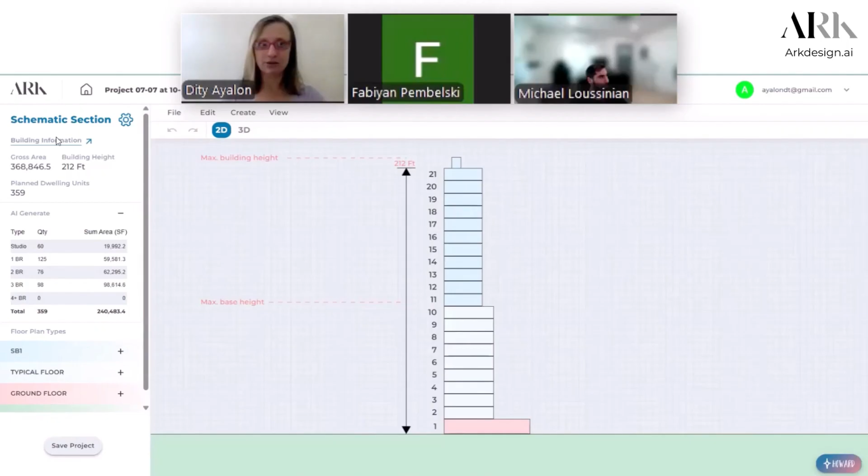And if we go to the building that you're going to create, you can see all the tables that were all done automatically for me, with the gross, net, and all that. So here we're going back to the project.

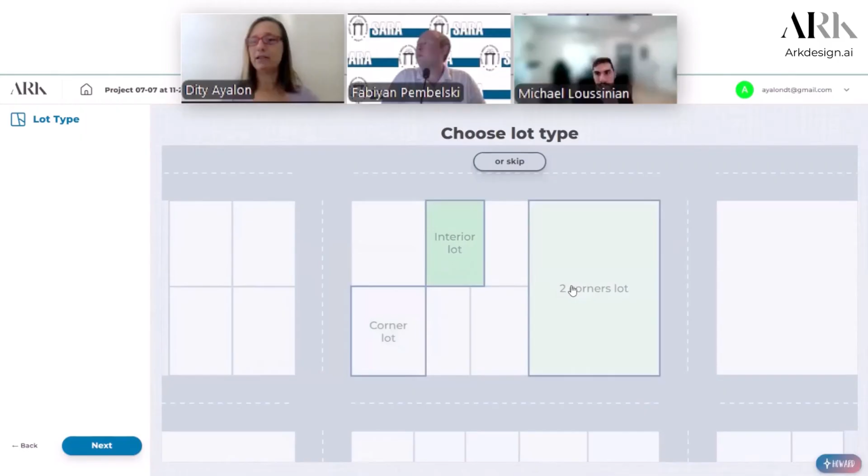Let's select the corner lot. You guys can select the interior lot or corner lot instead. But anyway, on the next screen, on the lot editor, you can change and edit it - it's for you guys to change.

The next screen is actually the lot editor screen where we insert the site conditions. Let's insert for the lower lot line 200 feet length, and on the side lot line let's do 180 feet.

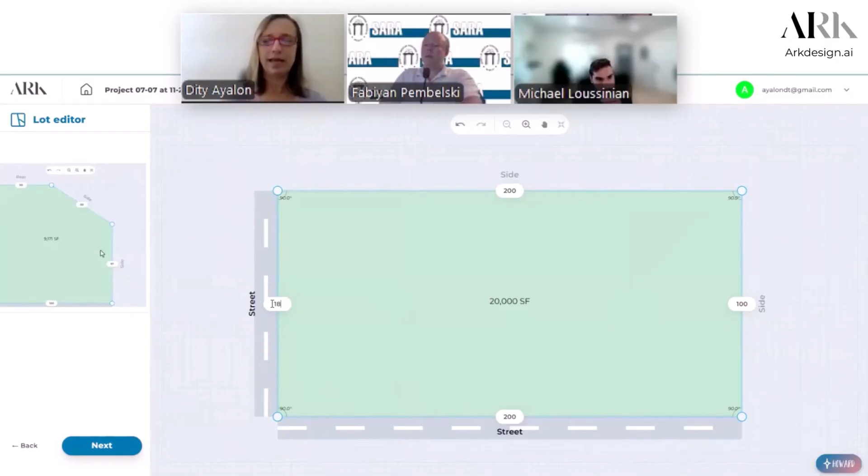Those are the lot lines and you guys can actually edit them with a pen tool. If I would like this side lot line to actually be a street lot line, I can do it here. And if I want this lot line to be a side lot line, I can change it here with a pen tool - so I'm making it a side lot line.

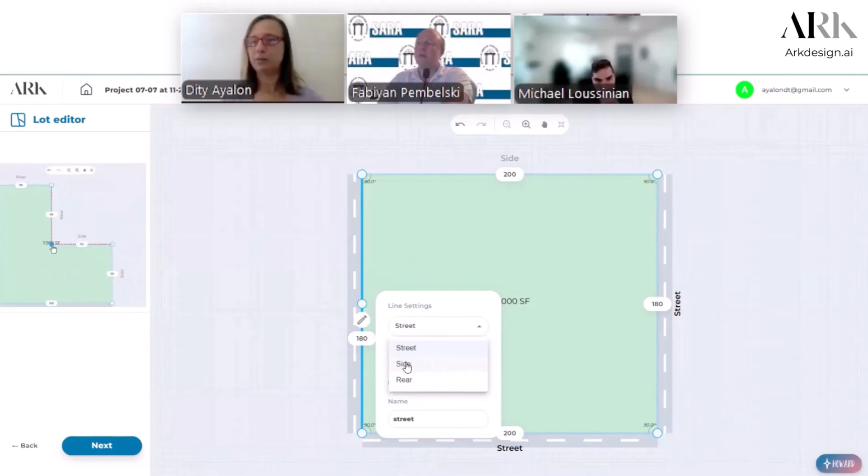I would also like to enable a building with massing. With a pen tool, you can enable an adjacent building and insert the massing of the adjacent building so you can see that on the 3D.

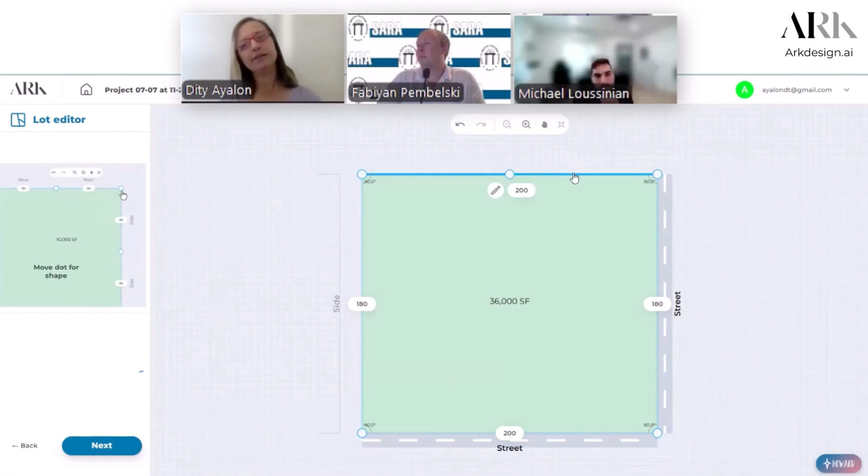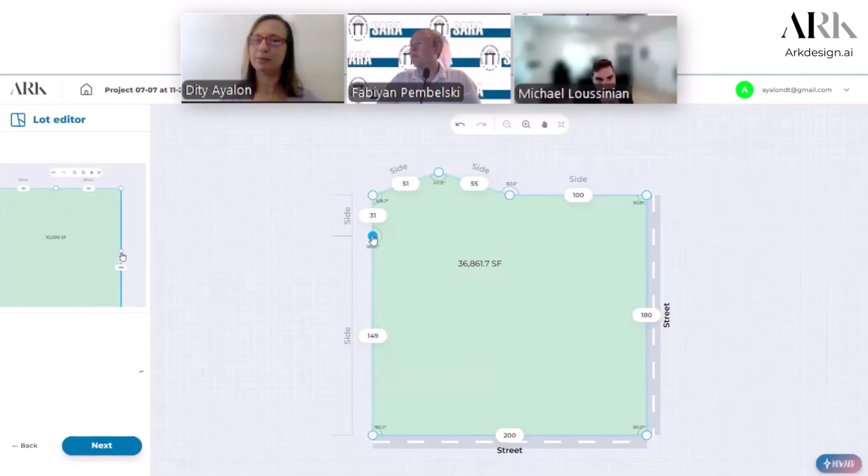Let's create a bit of an irregular lot just so you guys will get familiar with the tool - you'll play with it more later. Every time I touch a lot line, I get a dot, and touching this dot will split that lot line. Then I can play with it for a more irregular lot - I split, get the dot, click on it to split it, and then move that dot and do whatever I want.

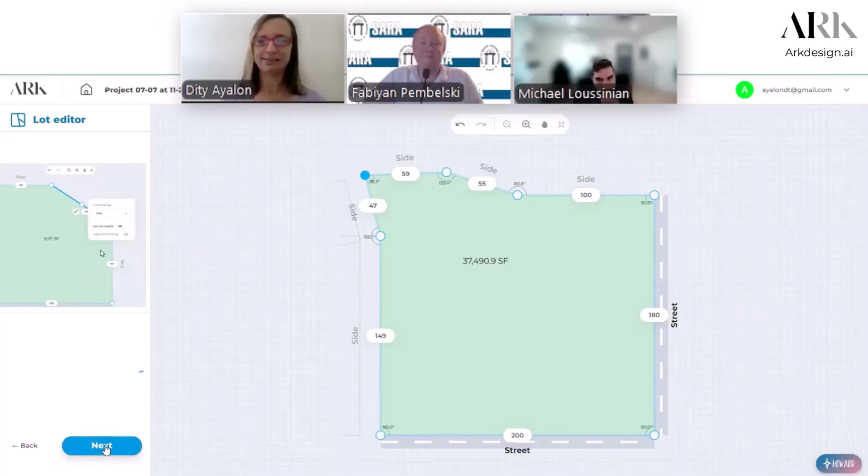In the next screen, think of your typical floor of your multifamily project. Yes, we do have a question.

Can we add an actual site in the background to trace it for plot areas? Great question, and the answer is no - you guys need to insert the site conditions yourself. We might have it in the near future, but still no for now. So you need to actually insert the existing conditions here in the lot editor. Great question, thank you Fabiyan and the person who asked.

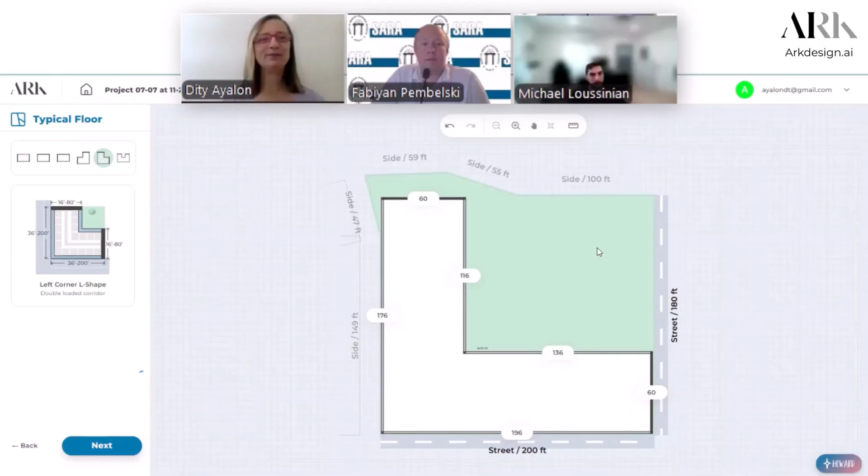You guys can play with the shapes and dimensions - U shape, different shapes, but let me do this strange L shape. You guys can select another shape, but always make sure if we're targeting a double loaded corridor, whether it's a U, an L, or just a rectangle, that the depth of the building will be between 50 to 80 feet.

Better probably is around 60 feet here. We'll leave it at 60, so we can get the templates for a double loaded corridor this time. But in general, we want to aim for templates, and then we can really play and edit it further in the next screen.

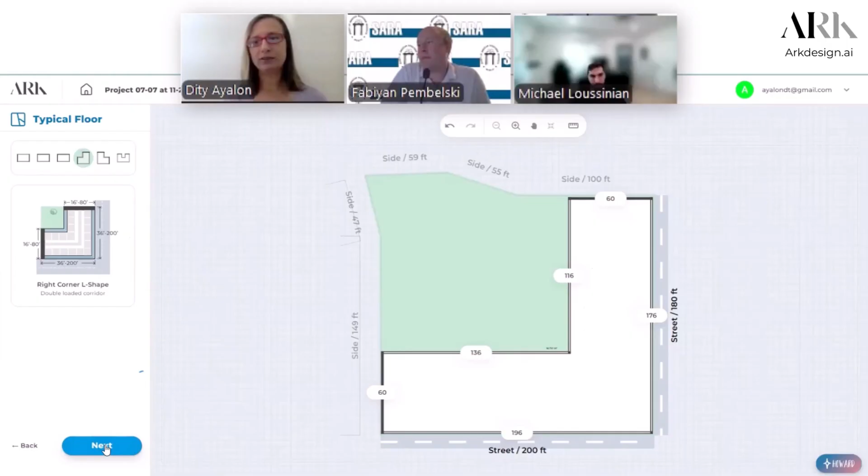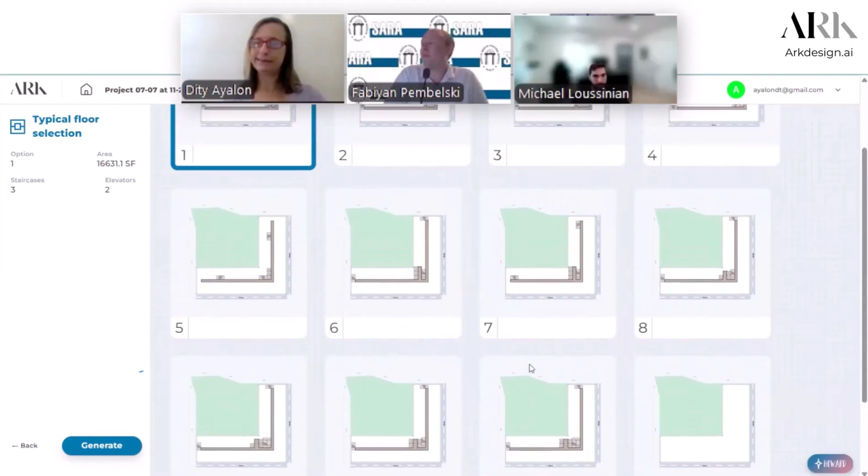So once we have our L shape ready, let's continue to the next screen where the software will actually offer us options. Now I don't see the scissors there in this case because the pathways are too long, but the software will offer us templates, including a blank template, and then you guys have to actually bring in the corridor and the vertical core. But let me select number 10, option 10.

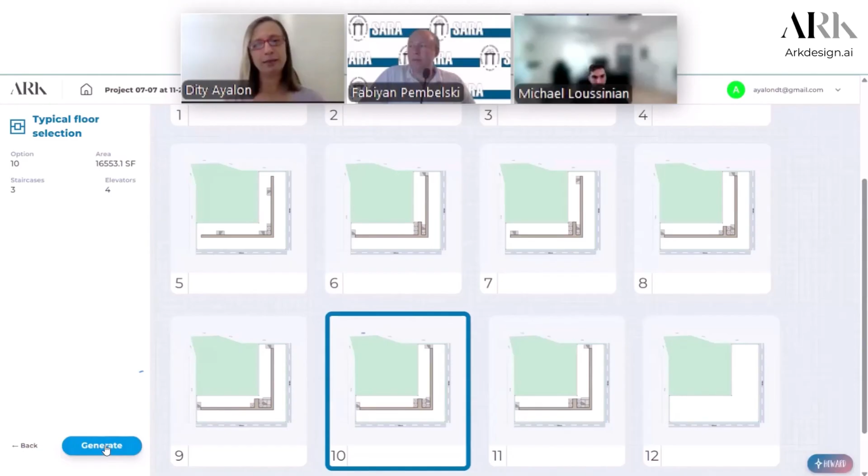Or with 4 elevators, maybe I would like to actually select 9 or 10. Yeah, let's go for the 10. And let's just generate a building. Don't think of your ground floor, mixed use floor, other floor—just let's focus on the typical floors first. And congratulations, we have our building generated.

Let's click on the typical floor that we generated and on the pen tool, and now it's our turn to actually edit it. So we can, with a mouse scroll and zoom in, move any vertical core that we would like to change the location of. You can do whatever you want. Let me click on the vertical core and rotate it and move it.

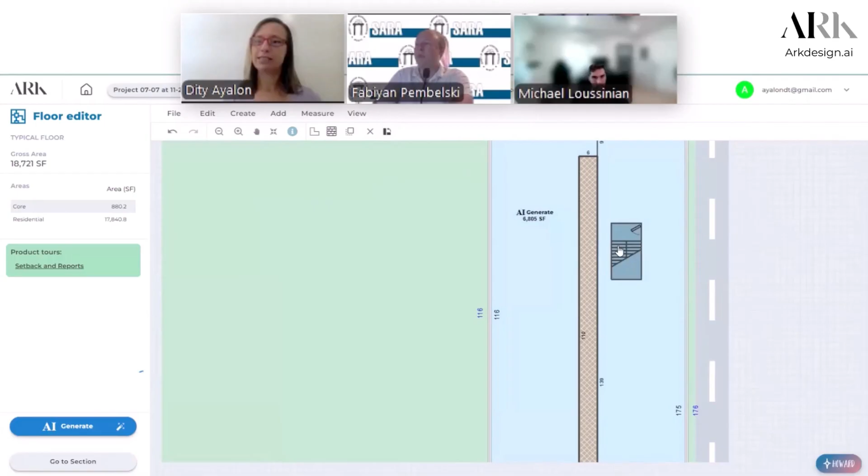It must be attached to the corridor. And I can click on the doors and change the location of the doors. And I'll actually get rid of this wall—so with X, I click on a wall and erase it.

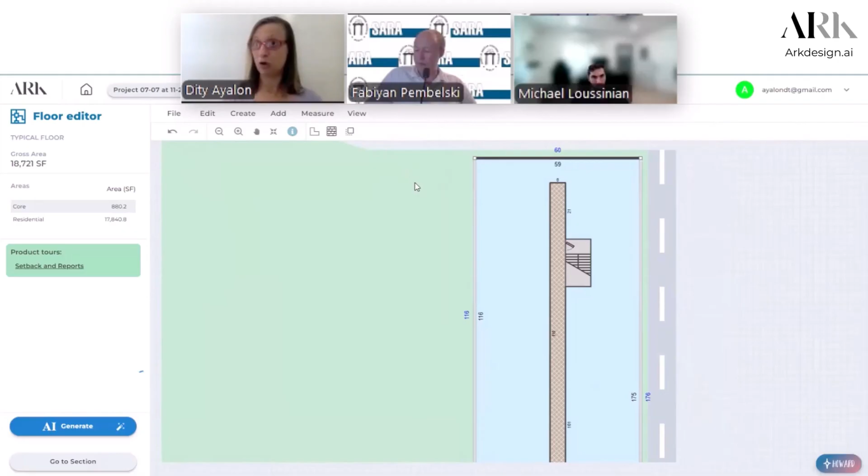And if we're looking at the walls, you see the light walls are all window walls, but we would like to create our lot line walls. Because this wall is next to a lot line, let's switch it to a block wall, to lot line walls that will not have legal light and air in this wall. And I can also do it here—just change this wall to a lot line wall.

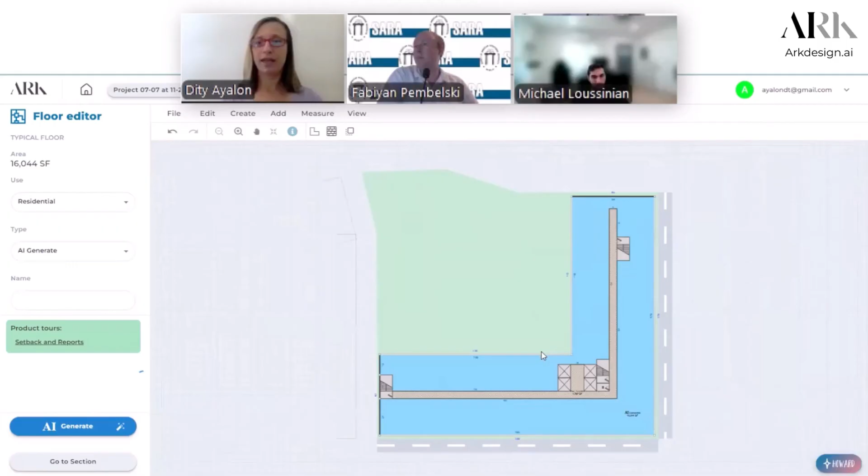And after doing that, I'm ready to generate the units, the dwelling units. So let's click on the AI generate.

And just for you guys to play around a bit, let's insert 100% 3 bedrooms. So you can see all the rooms, the legal rooms, are along the window walls that we defined for the system. And that's how the system will place the rooms, the bedrooms and the living rooms—look at it as a calculator for rooms.

Let's insert 100% 3 bedrooms just to see what the system will generate, and generate AI plans. So now you see the upper bar generating the floor plan, and the system is working. And now it's all 100%, 16 units. We're using 64 out of 64 rooms, creating this 100% 3 bedrooms, larger units.

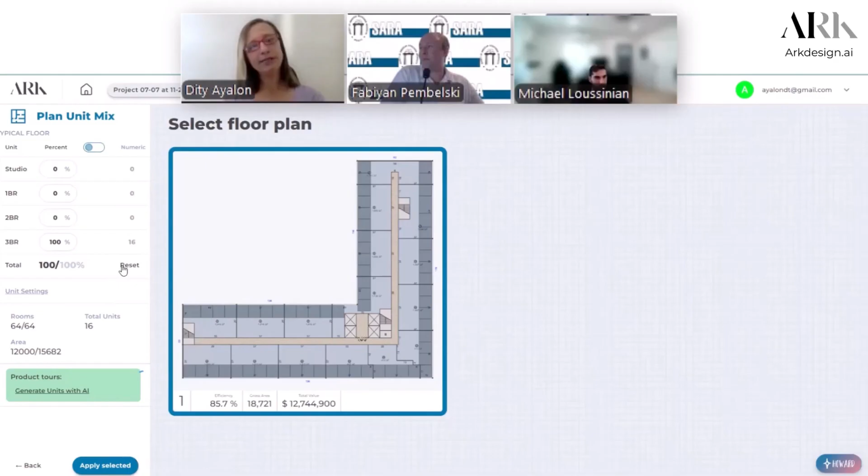Now let's reset and actually insert another unit mix. You guys can play with it—you can enter 100% 2 bedroom, 100% 1 bedroom. But let me think of a unit mix that might be good for this project.

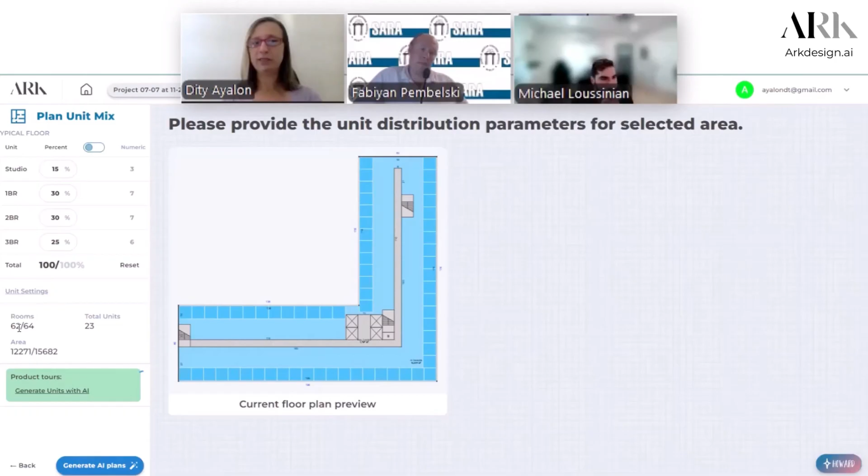So let's do 15% studios, so we want a small number of studios, and 30% 1 bedrooms. Let's do 30% 2 bedrooms, and 25% in order to reach 100%, 3 bedrooms, just as an experiment. And we're using 62 out of the 64 rooms that we have, so we're fine—a total of 23 units for this typical floor. So let's generate the AI plans.

And let me look at the chat if someone has questions, because I see a lot of... an email address. Okay, I see a lot of, yeah. So, okay. So yeah, I'm just looking a bit.

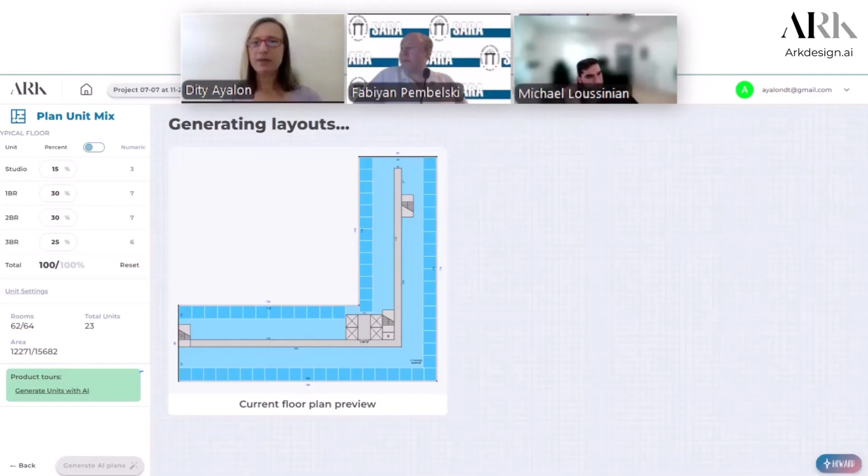So now it's generating the floor plan. And if you're looking at the unit settings, you can also set the width and the depth of your average room, if it's different—if it's a condo, if it's a rental, if it's in Bushwick, if it's in the Upper West Side—all depends on your market and where we're designing.

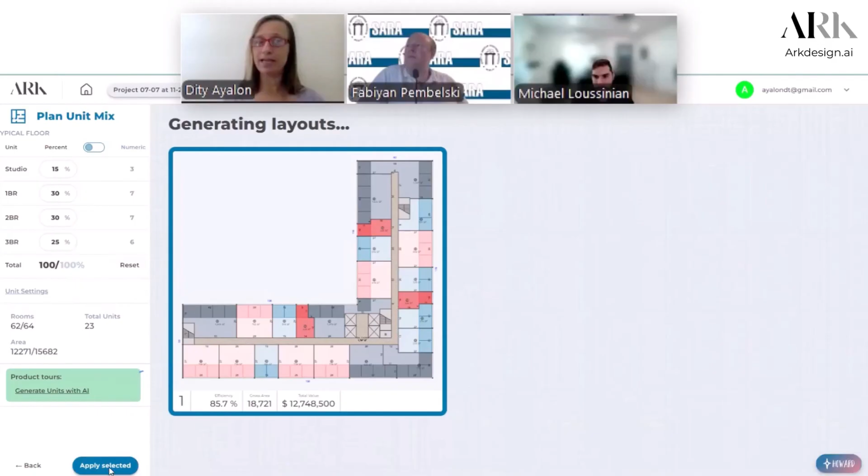And now the AI algorithm just created the unit mix, and if you don't like it, you can reset and create it again. I actually like it, and I will apply it.

And now I have the design of my typical floor. But if I don't like anything, for example, I want to make this unit larger, I can just merge it.

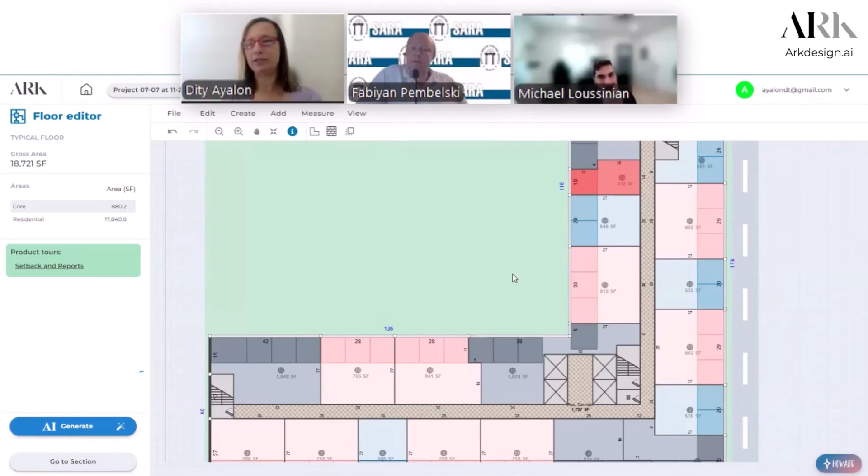I can just erase one of the walls and merge it, or select two units, this one bedroom, hold the control key, select also the studio, and then either erase it or merge it to one unit. It was a studio and one bedroom, and now it's one unit of two bedrooms.

So the two bedrooms are the pink, and they have three rooms, one living room and two bedrooms. And the blue ones are the three bedrooms, and the one bedrooms are, of course, the light blue.

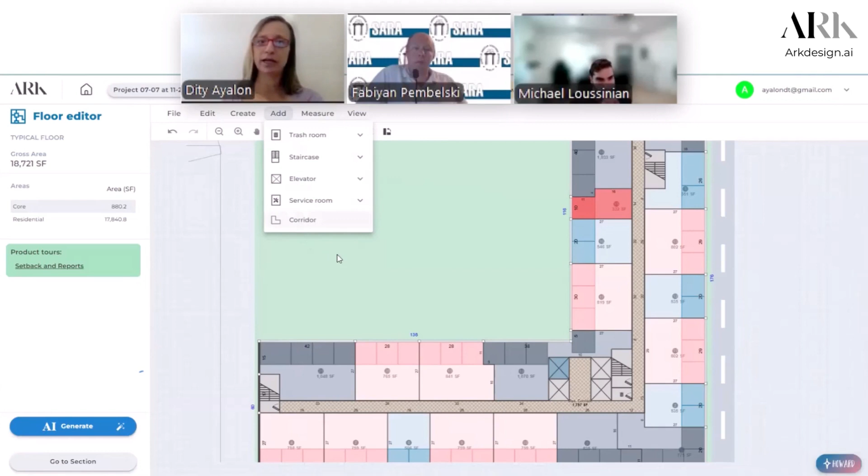So now we generated our typical floor, and you guys can add more elevators here. If you're getting the blank templates with no corridor or vertical cores, you can always add the corridor, push and pull, and get the corridor access to the units. I'll show you how to do it.

But this is actually our typical floor. And if I go back to the section and go to the building information, then you can see everything was done for me. So all the unit mix, I have the unit mix of the typical floor: 1 studio, 5 one-bedroom per floor, 9 two-bedrooms, and 6 three-bedroom.

We have a total of 378 units in our building, and you can see it floor by floor. You can see dwelling units for each floor, the net and the gross - the net is the carpet area, the gross is the demising wall to the demising wall, and the complete area of the exterior wall. So it's like a condo book area calculation, and we can see the distribution for each floor. And if we scroll down, we can see the use and the total area.

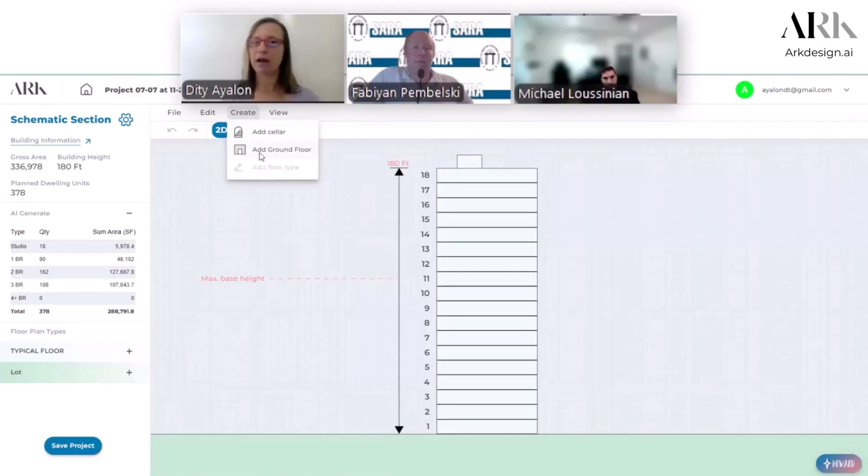Going back here to the section again, let's create our first floor. So we're creating and adding the ground floor. And let's click on that ground floor. And if you want it, this is 10 feet from finished floor to finished floor. But if we want it to be 12 feet, for example, let's insert 144 inches on our left panel.

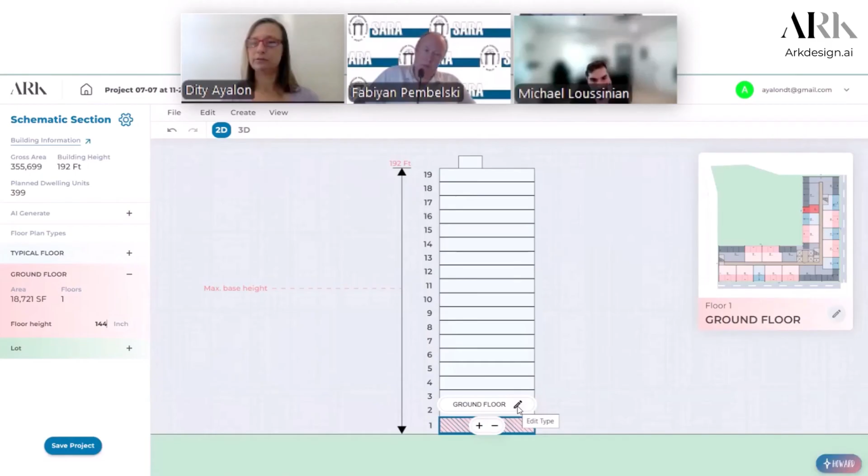And with the pen tool, let's design our ground floor. And this is our mixed-use floor. So with the control key, we can actually hold the control key and click on the units and select only adjacent units.

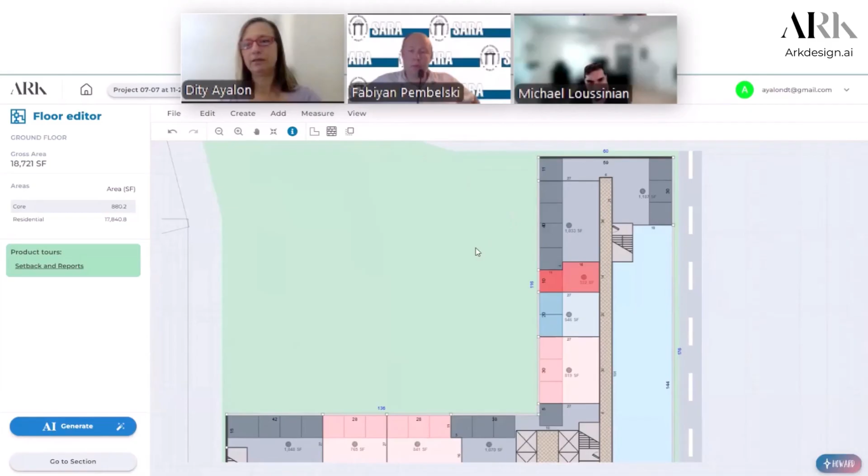And erase those units if we want them to be erased. And for example, now you can also play with the exterior wall, and the units will be automatically erased. I'm showing you there. Or just, again, control key, select the units, erase them with delete, or push and pull the walls.

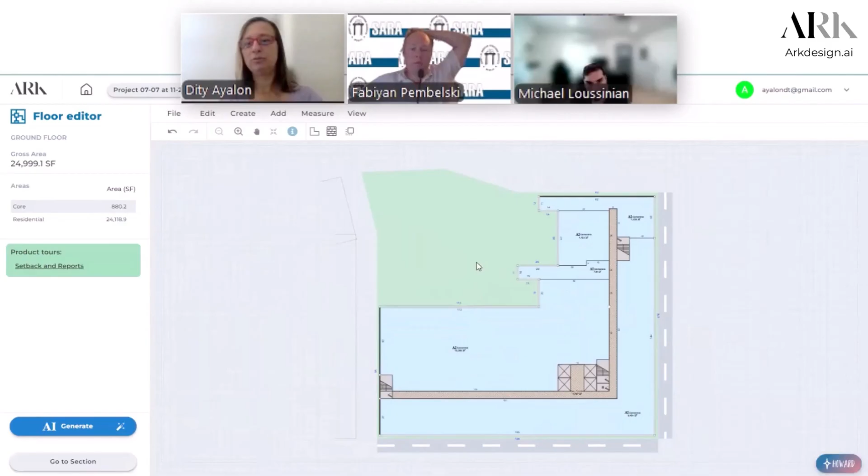And guys, start to push and pull your walls to design your commercial floor. And this will be kind of your free creation. So push and pull walls, and you can also split walls.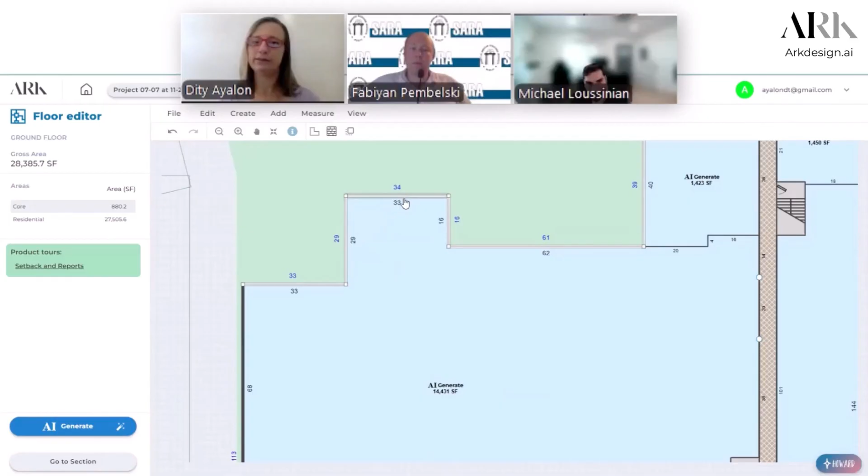And splitting a wall is clicking on a wall and splitting it with this icon, and then start to push and pull the walls. Or you can double click on a wall. I don't know why it's not working now. Okay, double click, and then you split that wall and you can work with it.

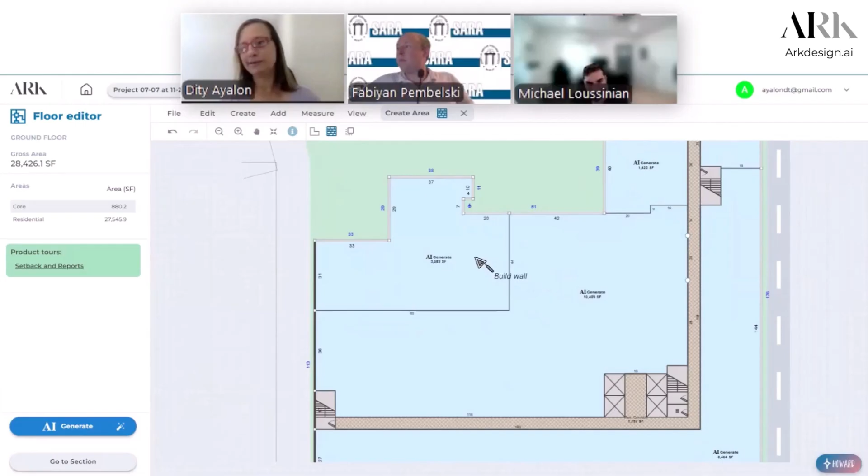Now to create new walls, you can also create a wall with this icon, the create an area tool, but you need to actually enclose that area. So you cannot just create one wall, you need to hold with the mouse, create the wall, follow it, hold the mouse, and enclose it. And now you have a different kind of area. So let's create some areas.

And close that. And now we can create our lobby, residential lobby. And if we want another residential lobby and some other ones, just play with the walls yourself, push and pull the walls, split the walls. Just explore it.

Now you can click on every area and either right click on the mouse, or on the left panel, you can change it. So if I want this area to be actually commercial, and I want my commercial area to be much bigger, I'm pushing and pulling the walls and creating my retail area, commercial area much larger. And it's for me to decide what area I would like to have as commercial, and I can have the area here.

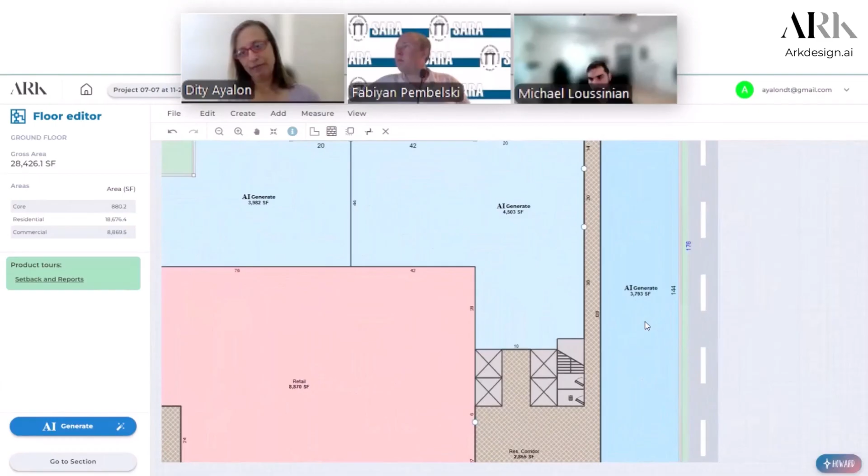I don't know, let's do it also community facility or park, yeah, community facility. And with the mouse, we can scroll and make it smaller, and we can make some entrance to the parking here.

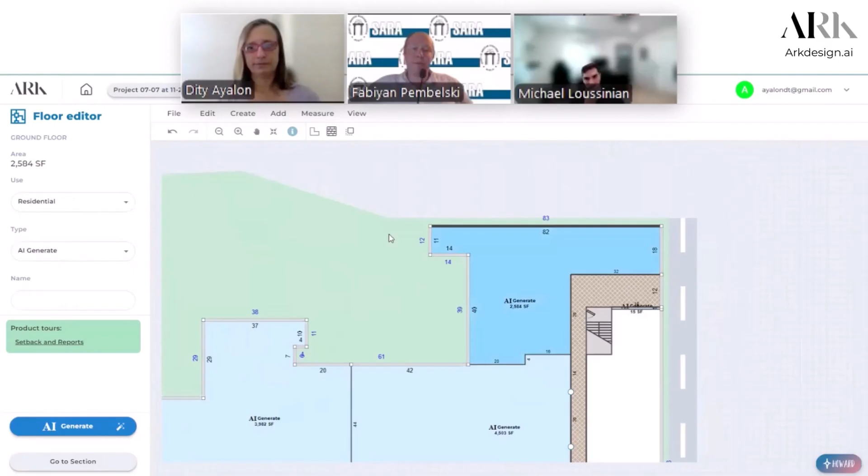And create parking here. So you guys are actually the designer, and I want some residential amenity, so you can split it to gym and other residential. So it's for you guys to actually design your first floor and explore, and again, work with the walls, do whatever design you guys need.

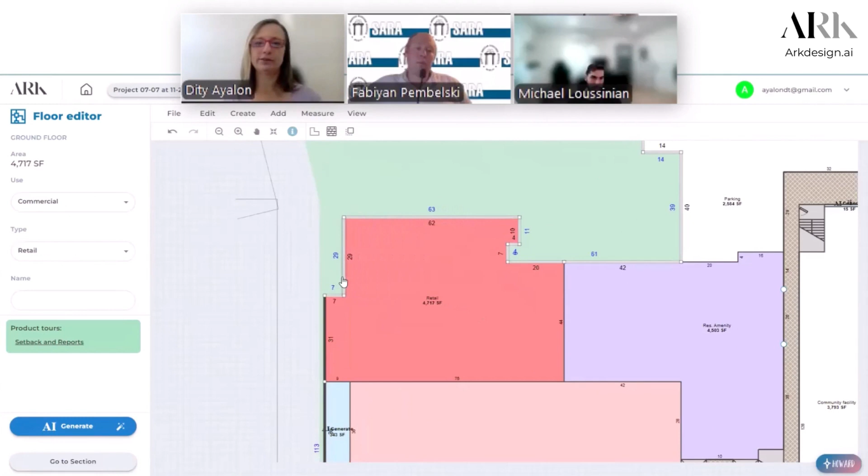And if you guys are in New York City, then we also have the deductions. So go to the section and you have the settings, and you guys can enable the deductions.

So, for example, if my commercial space has usually a 20% deduction, or you can also insert the area that you want to deduct, or my residential lobbies are usually 10% and I want to do 10% or more than that because I have corridors and it's 100% or 50% deducted, then I can just do the deductions that I want. And if my typical floor is usually 10 or 5% deducted, then I'm adding everything here and saving. And you can do it by area.

And in New York City, I know architects are always asking for the corridor area so they can fast calculate the deduction for the corridors. So we also have it.

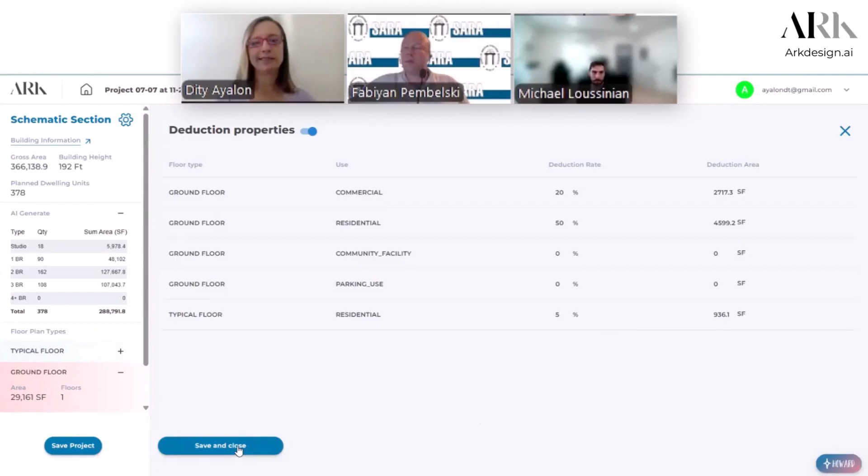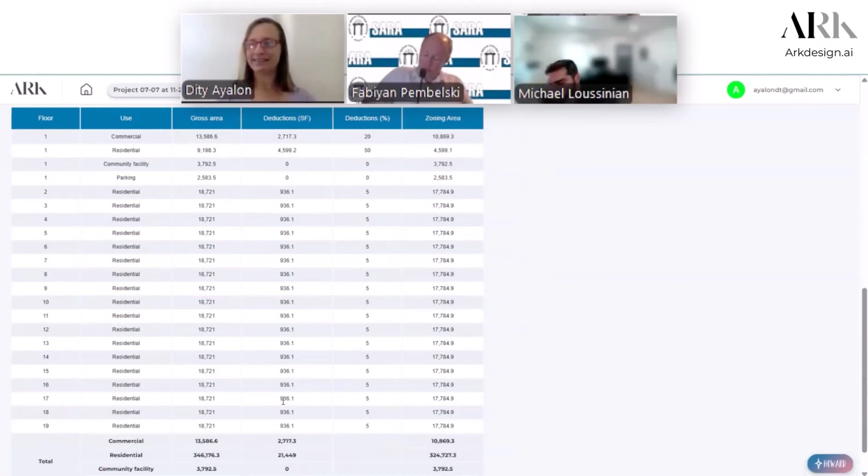And once we have it and close it and go to the building information, you can see that my deductions are also calculated automatically. So I don't have to calculate in Excel or AutoCAD or whatever. Everything is done. I have my zoning area, my commercial area, residential, community facility. Everything is already done here with the unit mix that we did before.

Now, because this building's base height is here, from the 11th floor and up, I'll have to do some setbacks. So let's try to do setback floors.

So double clicking on the top floor, and you see this double arrow, and I think everybody should do that with me now, and hold the control key and select other floors. So let's select all the upper floors, including the 11th floor, for the setback. After we selected it with the control key, we can click on the double arrow and create our new floor.

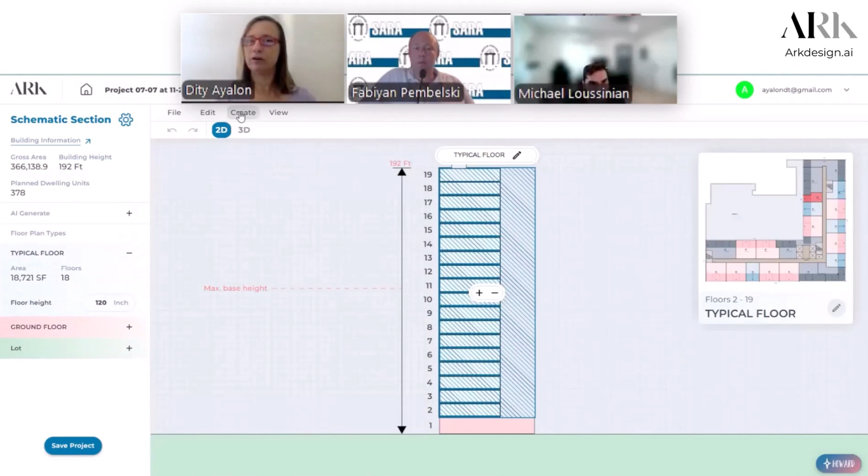Now I'll do it again just to make sure everybody saw it. Again, double clicking on the top floor. By the way, you can always add another floor type here, by clicking on the floor and adding a floor type above it. But I like to do it by double clicking on the top floor and then, with the control key, selecting the floors 19 through 11 and changing those floors to another floor type where I'm going to design my setback.

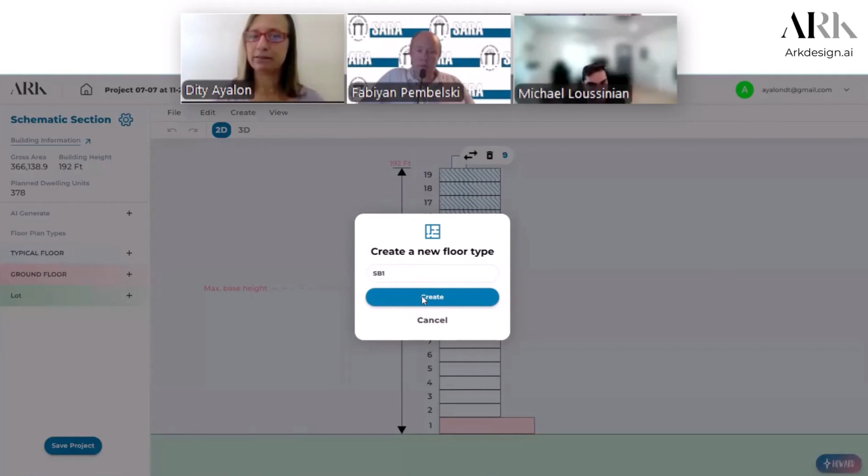So let's click on the double arrow and call it Setback 1, or you can call it 11 through 19th floor or whatever name you would like, and let's create that floor. So now you see it has a different color.

And now I can design it differently than my typical floor, and I can create the setback in this floor. So with the pen tool, again, I will select the units where I would like to do the setback, but all the rest of the floor, the demising wall stays stacked to the lower floors, because we like our building to be very efficient.

Let's click on the wall and push it 10 feet. Now you can also work with a measurement tool and create a dimension to make sure that it's 10 feet.

And now you have a different area. Now this dot, when we double click on a wall, it's splitting a wall. But if we don't want that, we can undo everything.

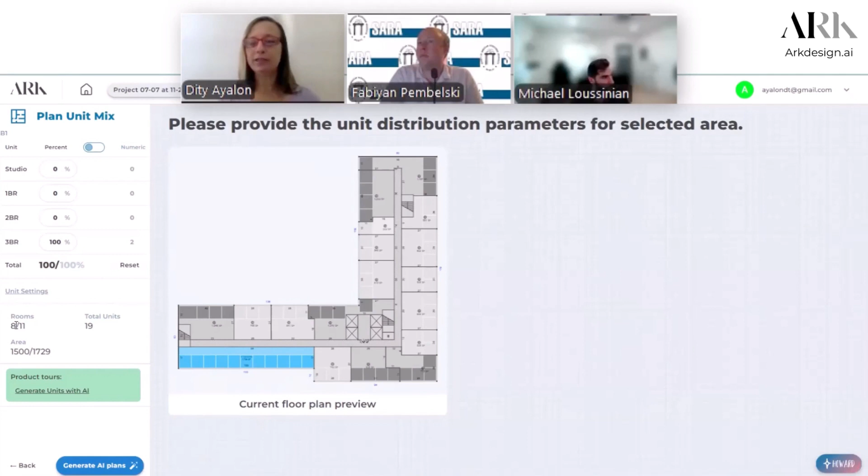So I would like to have 100% 3 bedrooms. I can create 2 three-bedroom units, and I'm using 8 out of the 11 rooms. If it's too little, I'll see it red. If I'm above the room count, I'll see it red too. But I'm fine here, and let me generate the plans.

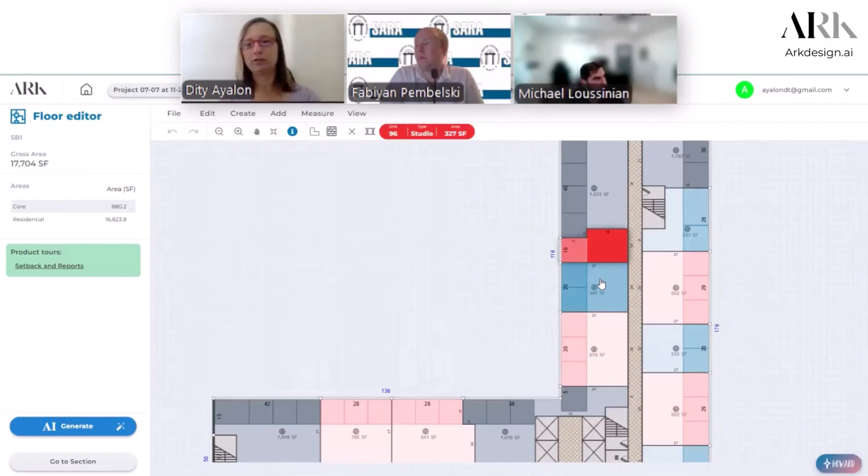So it's generated. If I don't like it, I can reset, but I'll just apply it. And if I would like to make some larger units here, I can select with the control key a unit, hold the control key, select the adjacent unit, and merge it to larger units, as on the top floors we don't want studios, for example.

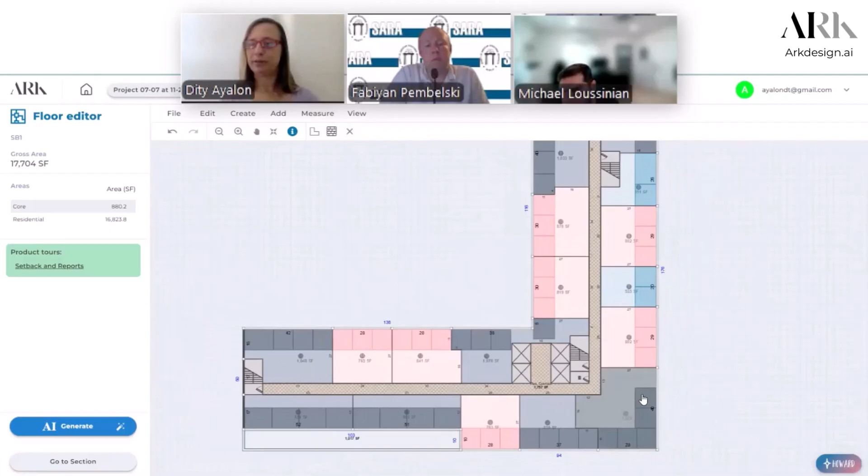And you can also push and pull walls here. So I want a really nice corner unit, and maybe erase some rooms because I want it to be only 3 bedrooms and now it's too many.

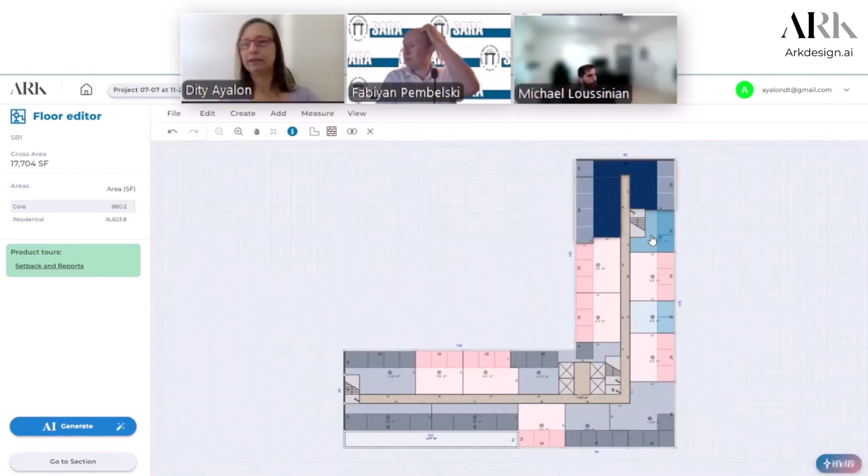So I'm fine with my setback floor. If I need to set back here, I'll do it too. Let's erase some units here too, hold the control key and select those units, and erase them. And we can also get rid of the corridor and move the wall and try to push and pull the walls so I can have it the way I would like the design of my building.

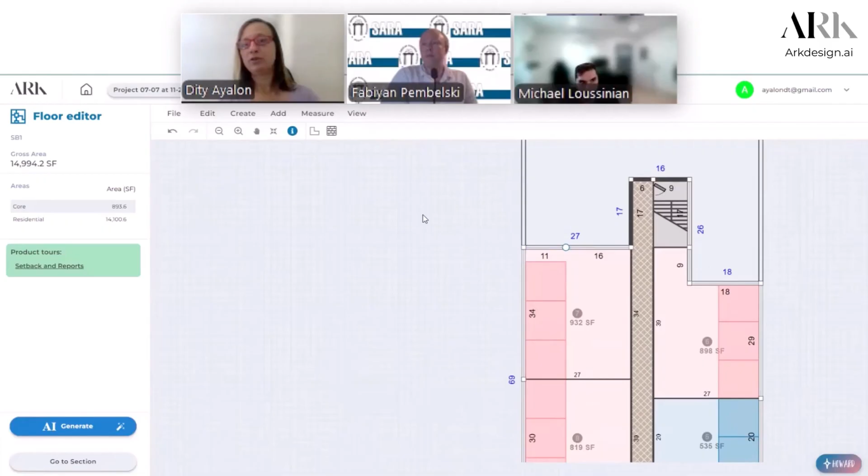And I would like to create window walls here, so I can change the wall to window walls. Make sure always when you're doing the AI generate that you have a corridor, window walls for the units, and the vertical cores attached to the wall. So those are the 3 conditions, and the AI generate would not work without it. I know it's confusing, but once you learn it, it's really fun.

So this is my building. You see the schematic section, or the side diagram of the building, where I can create more floor types and control my design. You can see the 3D of my building. I hope that it's your building too, or you have a different variation for the building.

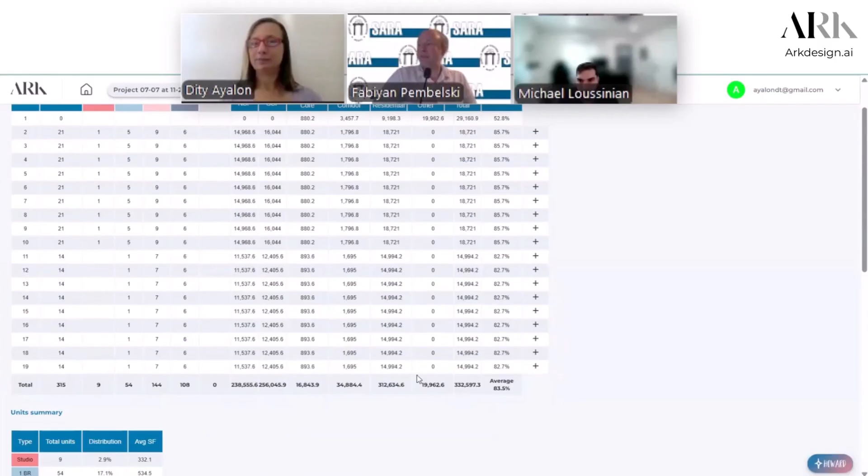And if we go back to the 2D — in the 3D you can really see the blue walls are the window walls and the white walls are the lot line walls or block walls where legal rooms are not placed. If we go to the 2D, we can go back and look at our building information, and you see that floors 11 through 19 have different unit mix, different net, different gross area.

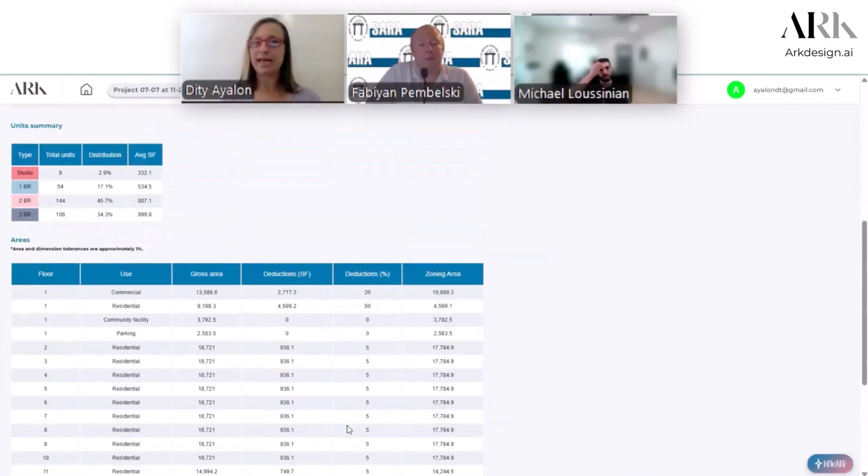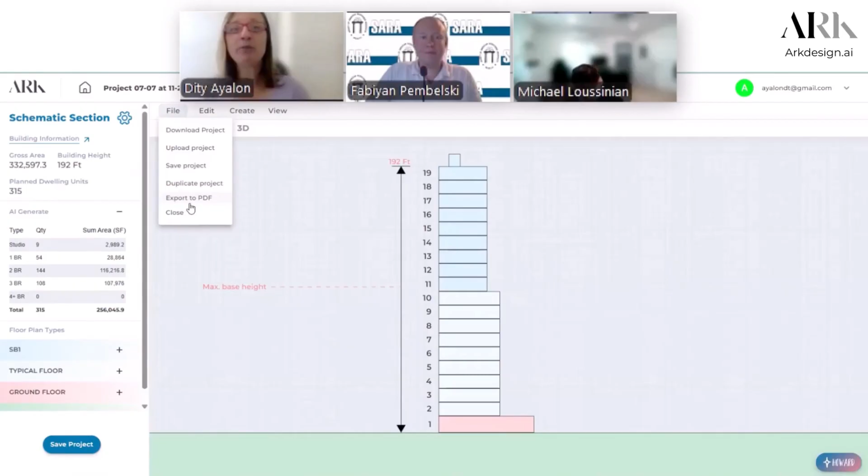We can see also the distribution for the whole building, the entire building, and then our zoning areas with the deductions. And if we go back again to our schematic section, we can go to the 3D or go here and export to PDF. And that's really fun, so I'm asking everyone to just export your project to PDF. Once you export it to PDF, then have a look at it, open it, check it out.

Let me see, how are we with the time?